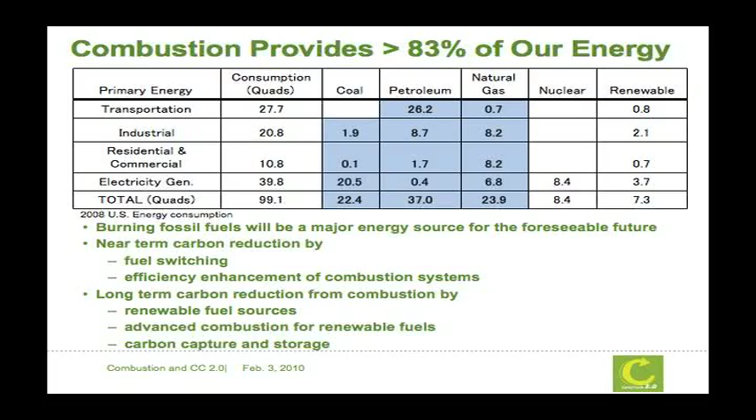You have seen this in various different versions. No matter how we look at it, burning fossil fuel will be a major source of our energy in the near future. I'm breaking this down into different energy and fuel sources, and the blue boxes are all relevant to combustion production. Even some renewables, for example in the transportation sector, actually involve combustion of biofuels. So 83% is what the US does, and other countries have different portions, but internationally combustion still plays a very major role in generating energy for us.

So if we want to look at near-term progress, what we can reduce carbon from is doing some fuel switching. I think we heard a little bit about fuel switching. For example, avoiding burning coal directly and switching to natural gas for power generation is a way of fuel switching.

Also, there's a lot of opportunity to increase the efficiency of the combustion system to reduce the overall carbon footprint, and we heard a little bit about how we can do that yesterday from my colleagues from Environmental Energy Technologies Division's presentations. In the long term, we can reduce carbon emissions from combustion by burning a lot more renewable fuels, and we also need to develop new combustion systems so they can be burned effectively. Of course, we have two talks previously on looking at how to capture and store the carbon.

To me, combustion is something the public is not very aware of in terms of its importance in their lives. Most of us know combustion from driving our cars, but if you look at this, there's a wide spectrum of technology involved in combustion in everyday life.

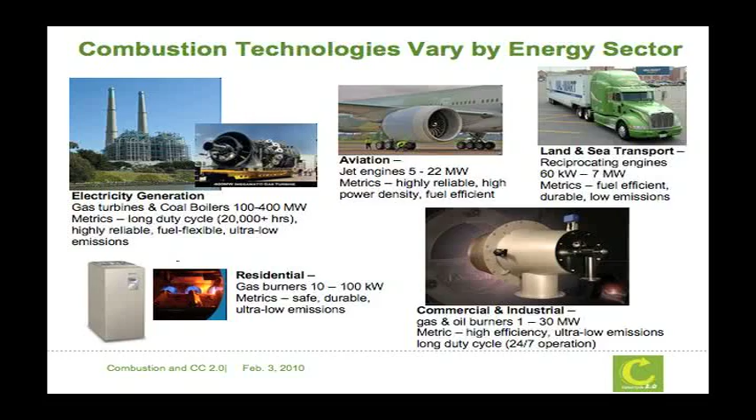For example, this is a power plant. This is a Moss Landing power plant down on the California coast. Most of the power generation is from coal, of course, and more is from gas turbines. Shown in this picture is one of the largest natural gas turbines being manufactured. It generates about 400 megawatts of electric energy. I don't know if you can see the people here, but this gives you the size of this engine.

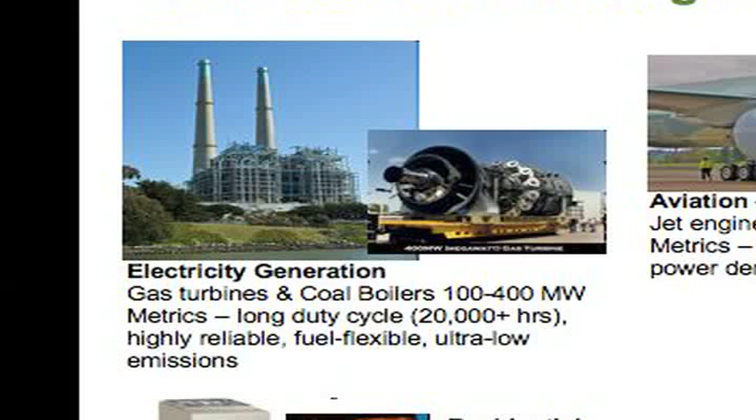The combustors are these cans here, which are the size of your typical garbage can. There's about 12 or 14 of them in these engines, depending on the size and needs. So basically, these are land jet engines, very connected with the jet engines we use for propulsion in civil aviation and also military aviation.

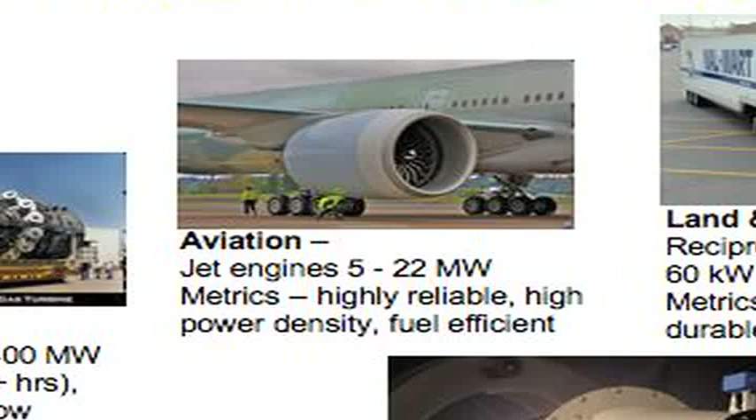Now look at the size difference. The largest jet engine we use to power a 777 extended range is only about 22 megawatts, so these are much larger systems for stationary power generation. Land transport trucks are actually quite small compared to stationary power generation systems, and they have very different performance requirements as well.

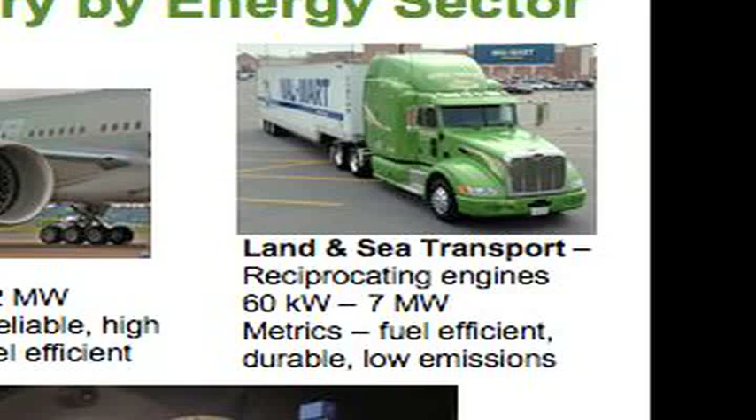For example, in power plants, they need to operate for close to 20,000 hours continuously before servicing, whereas in land vehicles, the lifetime is only about 10,000 hours, and we can stop and start them on and off again. So as you can see, the combustion technology for different sectors requires different kinds of approaches.

Now, turning to another major source, stationary systems are these commercial industrial burners. You may not know this, but they generate a lot of the products that we use. These systems typically run from 1 to 30 megawatts, and the burner itself, the combustor, is about 6 feet in diameter. They burn at atmospheric pressure, whereas these other systems burn at high pressure, so you can see the size and scaling of combustion systems are quite different.

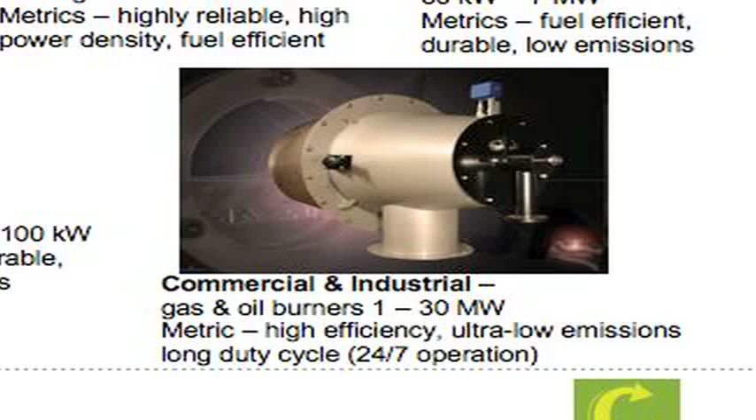And then there's a little residential burner that we're very familiar with in our home. So how do we deal with the combustion research problems? Actually, combustion is an integration of the multi-scale dynamics between chemistry, thermodynamics, and fluid mechanics.

On top of that is also the combustion mode. You may not be familiar with combustion mode. For example, a non-premixed flame is a Bunsen burner when you turn the air hole off. A partially premixed flame is when you turn the air hole on, and this is what you cook with, and this is what you heat your home with.

Premixed flame is when you have exactly the amount of air needed to oxidize all the fuel. That is basically an engineering development; it does not occur in nature. But that's what we are focusing on right now, to apply premixed combustion to all our power and heating systems.

On top of that is fluid mechanics. This is where I come in because I'm trained as a fluid mechanician in mechanical engineering, so I look at flame as a flow phenomena with reaction generating a lot of thermodynamics.

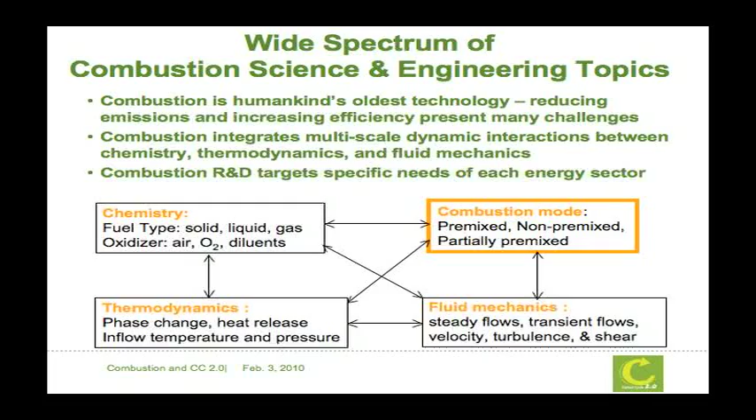In the near term, we can replace coal with natural gas. Another one we did not touch upon today is coal gasification. The technologies we've been hearing about in the last hour or so capture carbon from the exhaust of the combustion—those are called post-combustion capture. But there are technologies where you can capture the carbon in pre-combustion.

Vaporizing liquid fuels—we are doing it actually in our vehicles now, because even though we put liquid fuel in our car, when it burns, it's actually burning in gaseous form. Fueling land vehicles with gaseous fuel, natural gas fuel vehicles, or fuel cells, charging electric cars—those are very good options in the near term.

The challenge here is that we need to build fuel-flexible combustion systems. What I mean by fuel-flexible is that the furnace in your home is very well calibrated to natural gas of a certain range of heat values. So even if we're using liquefied natural gases, there is a concern that your home furnace may not work. This is a big challenge in the combustion community: to develop what we call a fuel-flexible combustion system, and also to meet very stringent emission standards.

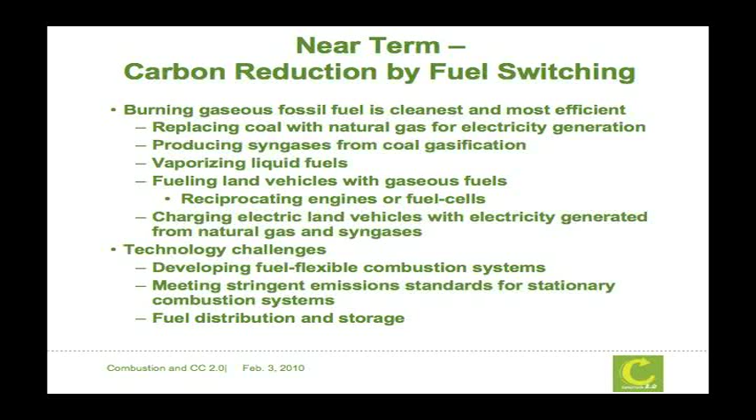The stationary systems are the most regulated system in the combustion arena. For example, many stationary systems are now required to emit less than 10 to 5 parts per million of oxides of nitrogen. So those are very challenging problems.

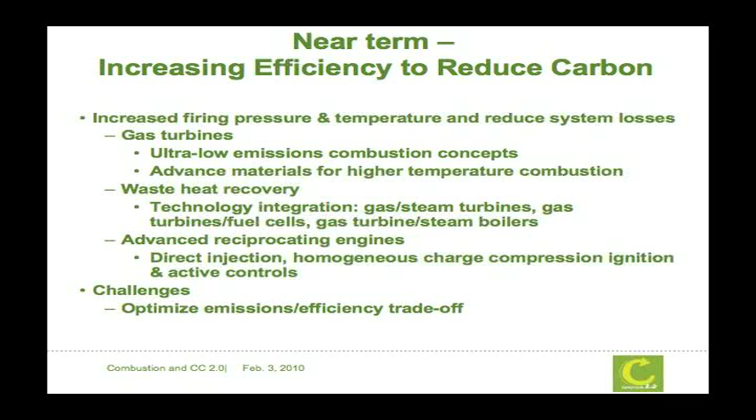We increase the firing temperature and decrease system losses—that's another way of reducing the carbon footprint. And again, the challenge here is to increase the efficiency without sacrificing emissions.

So let's turn to combustion research at LBNL. The majority of the efforts is actually conducted by the chemists. In the chemical science division, we have a large group looking at the chemistry at the molecular scale.

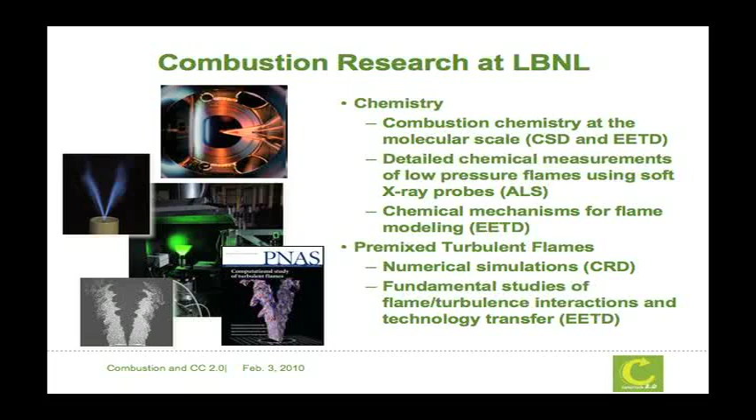At the ALS, they are using low-pressure flames and soft X-ray probes to look at detailed chemistry inside the flame, and then develop chemical mechanisms for flame models. Normally, in the combustion research community, there's an intermediate step to take the chemistry into a laminar flame model before going into the turbulent flame found in all combustion systems.

But because of the development of the supercomputer and high-power computing here, John Bell's group and I basically skipped that step by going directly from the numerical simulation, taking the chemistry, to simulating full-scale laboratory flames. This is one of our first collaborations, and you may see a version of that as a logo on the Carbon 2.0 poster.

Just want to make a point that this flame is stabilized by a 2-millimeter rod. The stabilizer for the flame is very important because somehow you need to hold it down. Okay, that was the old paradigm.

I'm going to switch to talk about the low swirl burner. The low swirl burner was discovered about 1991 when I was trying to find a robust burner to apply my laser studies. Because it's a very good laboratory burner and it stabilizes very lean flame, I thought that may be a good use of it in practice.

There are many, many different applications as well. More importantly, because we were able to deduce how the burner operates, we were able to scale this from the laboratory size of about 5 kilowatt all the way to the very large gas turbines I was talking about earlier, by getting some scientific underpinning of how the burner operates.

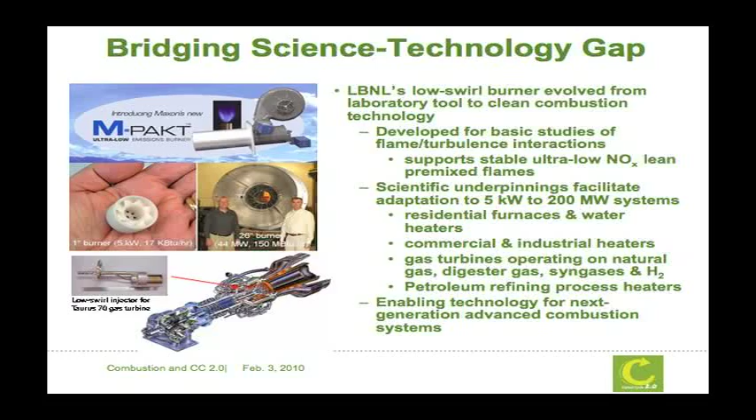Right now, we have projects to put it in your home furnaces and water heater. It's already commercialized for industrial heaters. We have projects looking at burning digester gas, one of which I hope will be in the East Bay MUD water treatment plant right off the Bay Bridge. We're also developing it for the clean coal power plant, and working with some companies to look at how we can combine the burner with other technologies for the next generation systems.

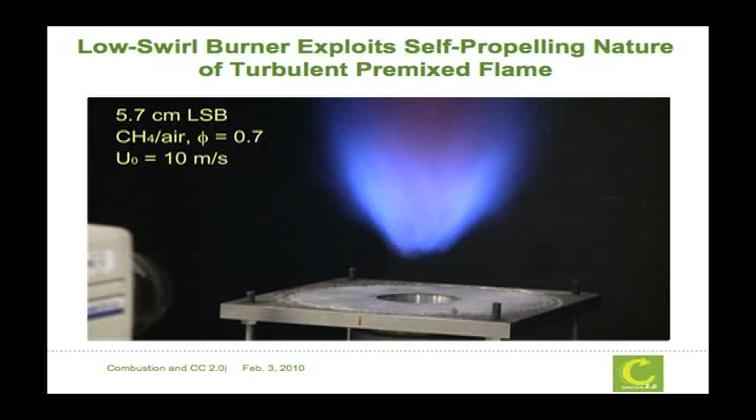Right now we're running at about 10 meters, but there are experiments to show that it can run all the way up to 130 meters.

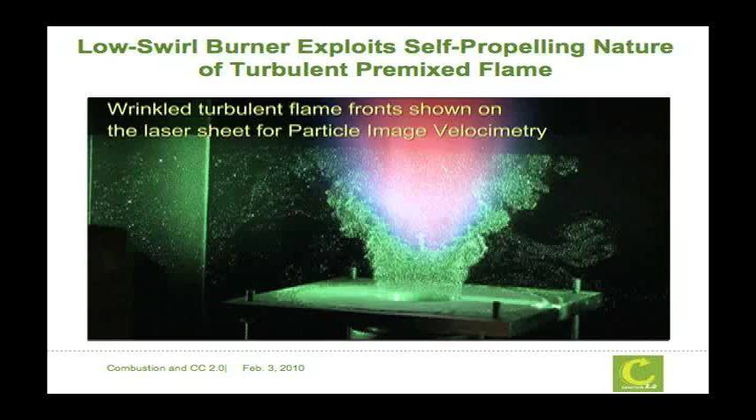All the chemistry actually takes place in the boundary between the bright and the not-so-bright area. This is where all the chemical heat release occurs. But for the pollution formation, actually the place is here—heat release here, and the pollution formation is a little bit further downstream.

The important thing about our collaboration with the simulation group is that it helps us identify what are the important basic subjects that we need to study. Here we have a national lab, university, and industrial collaboration to look at how we take the burner for what we call high hydrogen fuel gas turbine and clean coal power plants.

Most importantly, we need to look at these flames at high pressure. At LBNL, we can only look at it at atmospheric pressure. But taking these flames to high temperature, high pressure is non-trivial.

Chemical kinetics of hydrogen and syngases maps to the effort here in the laboratory in the chemistry area. The heat release model, which we're working with John Bell's group on—as I said, this is all we can get, some sort of planar velocity at different heights of the flame. But they can give us a wealth of information if we're able to analyze the computational result the way that we analyze the experimental results.

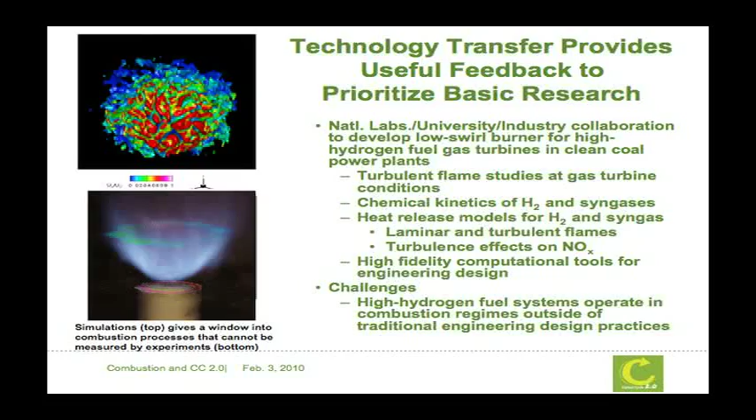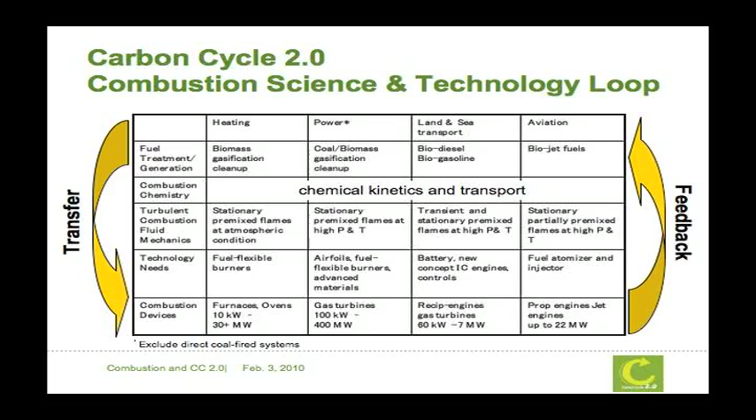Now, of course, the whole picture doesn't really rely on combustion alone. In one sector we need fuel flexible burners. But the other thing is that when we look at gas turbines, we need to look also at the airfoils that we need for the compressor and also the turbines. And also advanced material—if we were to take the firing temperature up, then the materials have to be able to withstand 1,000+ hours of operation without degrading.

In the land and sea sector, for land, of course, battery is very important because we can switch from a petroleum fuel car to an electric fuel car. So we need to have all of this as the whole part of the equation.

So in the long term, what can we do? We need to look at reciprocating engine and jet engine for biofuels. Our sister laboratory over in Sandia, in Livermore, has a very large group looking at reciprocating engine research, and we can certainly work with them on this.

Near zero emissions coal power plant is what we're working on right now. Of course, we're looking at only the combustion part, and also, as the two previous talks showed, we have capabilities here to do the capture and storage. Fuel cells and gas turbine hybrid systems, and on and on.

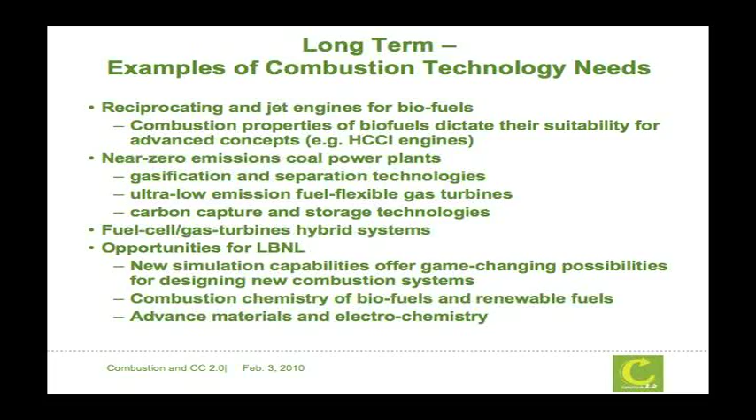What I'll leave you with is that, in my own experience, the new simulation capability here in the laboratory can be a game-changing possibility for us to look at new combustion systems. And with that, I close, and thank you very much for your attention.

So I'm going to start off as our point of reference, the Carbon Cycle 2.0 initiative, and this picture that outlines some of the various areas we are interested in for this new lab initiative. What I'd like to do is weave a story about the mathematics and computer science that goes into, if not all, at least most of what's going on in this initiative.

So I'll start off by talking a little bit about the computing science facility, because every time I talk to people at the lab, they always say, oh yeah, computing, that's about the big supercomputing center you have. And in fact, that is a large part of what we do, but I'm going to tell a slightly different story. To start off, I'll tell you a little bit about the computing facilities we have.

Currently we have a computer depicted here, which has about 38,000 processors, or cores as we like to call them now, with a peak speed of about 356 teraflops per second. In the very near future, within a year or so, we're going to have a machine with 5,000 more cores in phase 1. In phase 2, we'll have on the order of a petaflop of computing power per second.

Now, what does that mean to the average user? Well, in 2011, we'll have on the order of about 1 billion CPU hours for people to use for their simulations, modeling, and so forth. In addition, we have some new money that came in this past year to hire postdocs to work on a new initiative called the Computational Science and Engineering Petascale Initiative, aimed at getting people hired to work directly with people in domain sciences to take their codes so they will be able to run on such a machine. So that's the computing facility.

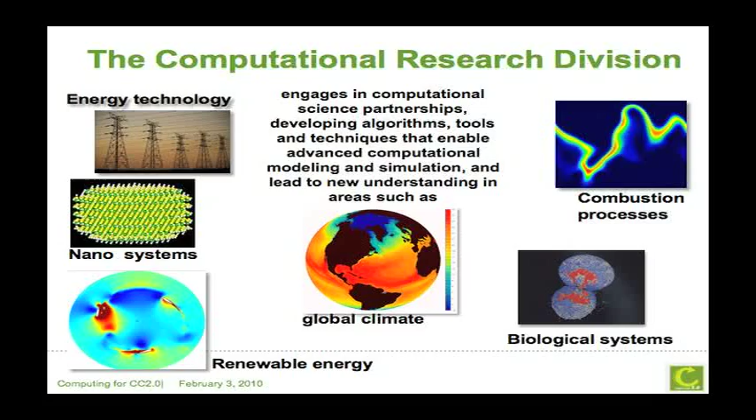I've outlined here some projects that are already ongoing, and you'll see some that have already been alluded to by my colleagues: combustion processes, some global climate calculations going on, some renewable energy projects, some simulations in nanosystems, and even power grid simulations. What is common to all of these is that we're using the mathematics and computer science to address very large-scale problems through collaborations with other domain scientists.

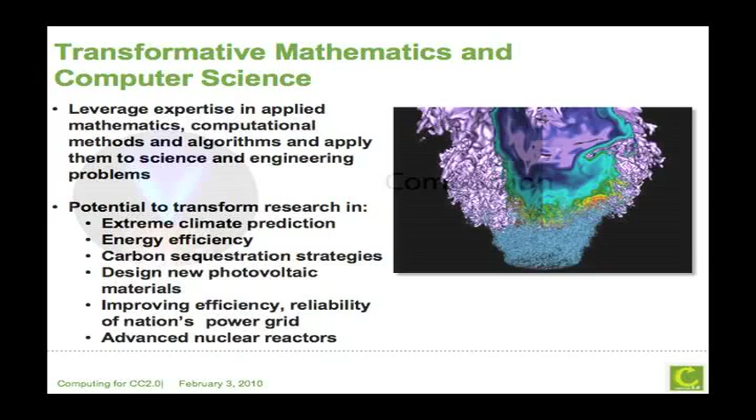So what I'd like to do now is jump into a couple of stories to highlight some of the activities and give you a sense of what kinds of things are possible when you put these folks together. All right, so let me start off with combustion. That was the one that's freshest in your mind.

I want to talk a little bit about the mathematics now that Robert was alluding to. So what's going on here? When John Bell started working with Robert, I believe it was 1996 or 97, roughly about 10 years ago, a little over 10 years ago, they started looking at these problems, and they saw a problem that looked very interesting, but by no means did they have the formulations or the codes to do something that would be even remotely of interest to Robert, I'll have to say. I mean, they were very, very large scale. Now, this is not to say anything about the codes themselves. Rather, that was the state of the art as it was at that point. The reason I like to tell this story is because it has all the components that I think are necessary for a successful collaboration.

So let me tell you what the components are.

First off, what John and his group did is they looked at the mathematical formulation that was being used at that time and realized that it was highly restrictive and was really cramping the computational speed that could be attained, because the formulation had everything in it.

What they did was realize that parts of the math in the original equations really were not necessary, they were unwanted. They got in the way and restricted the time step needed to solve this problem accurately. So they did what most good mathematicians do: if they don't like something and can't solve it very well, they got rid of it.

So why not just grid up around the area where you believe the most interesting phenomena are and concentrate your computational work just on those areas. That involves a lot of software, trying to understand how you might adapt that mesh so it goes where it should be. For us it's easy, we just look and say it should follow the flame there. But on a computer it's a little more complicated.

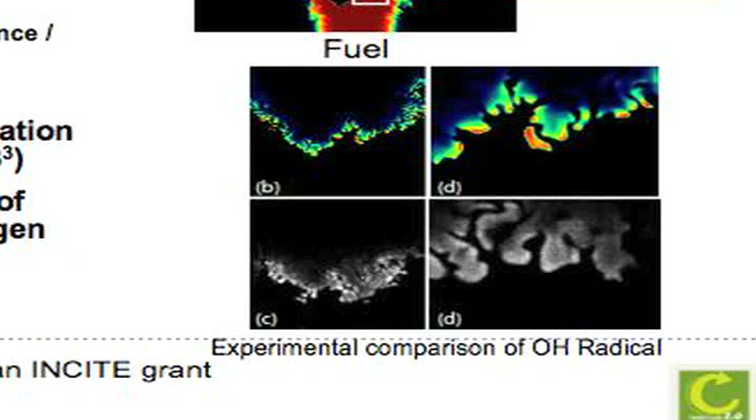So that's the second component. They use adaptive mesh refinement to highlight and focus the computational work just on the areas where it's needed.

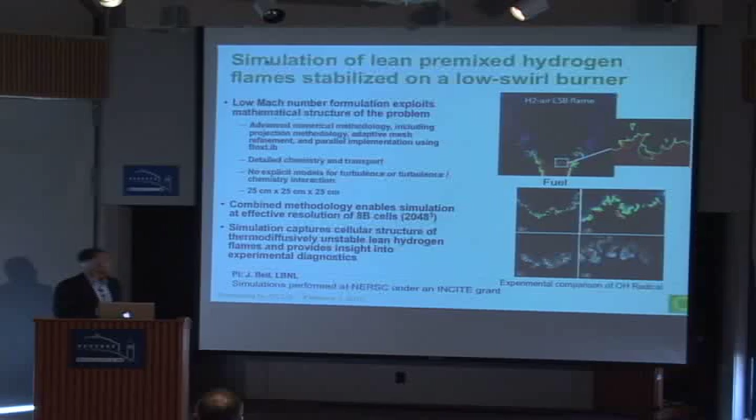The third thing is that because of the advance of computers, in particular massively parallel computers, we're able to take advantage of the parallel processing power to get an extra speed up factor of about 4,000. When you put all of these things together, you now have a code running about 800,000 times faster than it was in 1996.

All right, that's an important enough number, I'll repeat it again: it's 800,000 times faster than it was in 1996.

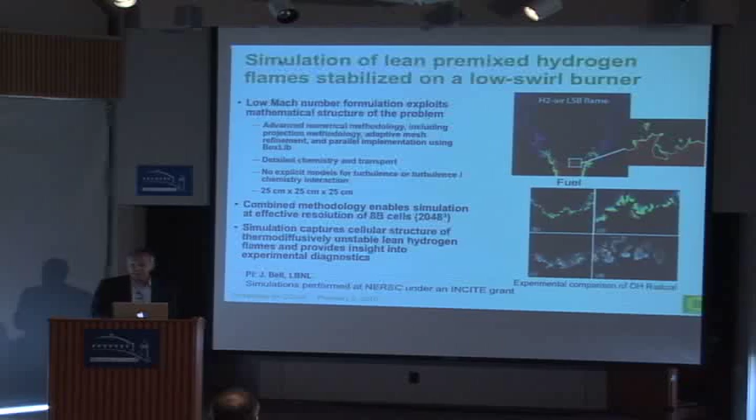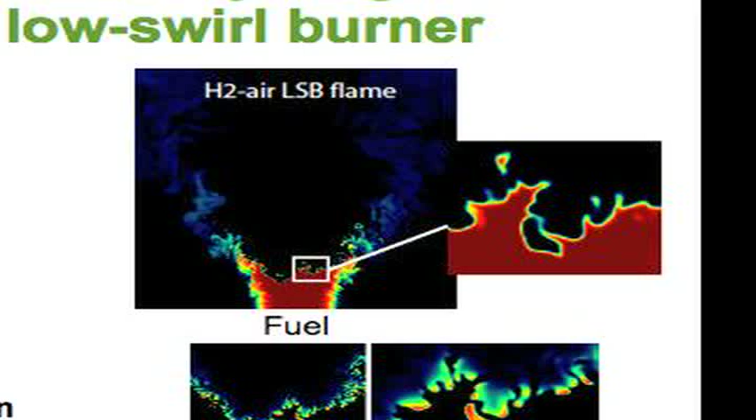What that does is it allows you to actually start thinking about looking at laboratory scale simulations. This little picture depicts what was available back in those days. Now you can take a look at a whole flame, like a low swirl burner, and look at the entire flame in the laboratory and compare that against experiments. So the combination of the math, the software, and the computers gave you that kind of capability.

So now you are able to simulate something that would be the equivalent of 8 billion cells if you were to do something naive like a uniform mesh.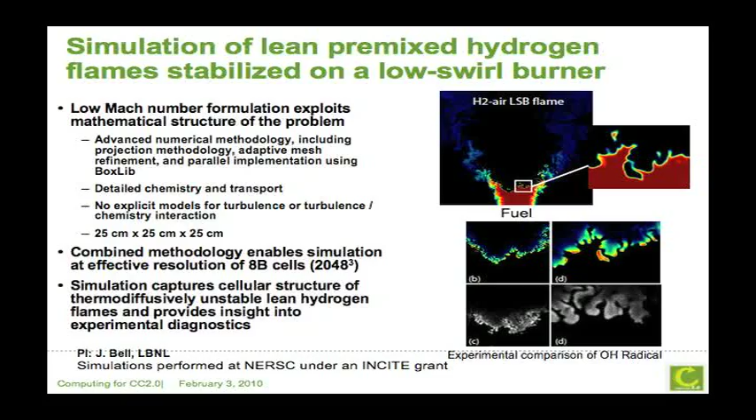Now, what that simulation allows you to do, and this is where I think the really exciting science starts to come into play, is that you can now capture the cellular structure of these turbulent lean hydrogen flames, premixed lean hydrogen flames. So you can actually start to analyze what's going on in the simulation to then feed back information to the experimentalists, who can come back and ask more pertinent questions.

A picture's worth 1,000 words, a movie's probably even more. So here's a simulation that John Bell and his group came up with.

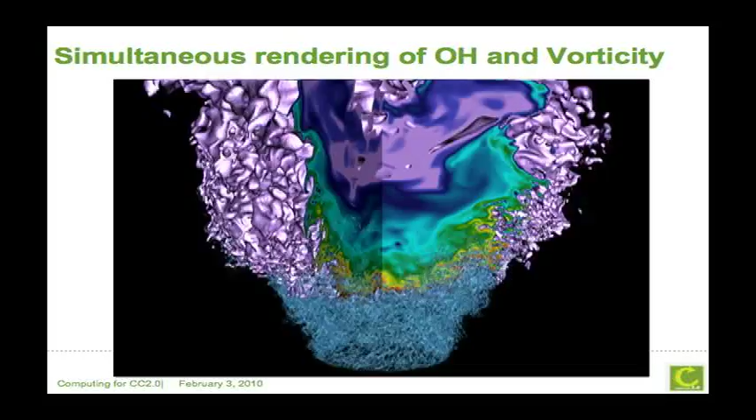What I'd like to point out is not so much the details here, but look at the swirl coming in, the flame in here, and the detail and wrinkling of the flame itself from the simulations. You can see out here where there's not a lot of action, there's not a lot of meshing going on, so you're not doing a lot of computational work there. You can start to quantify what's going on and ask questions about how a different design might affect the flame, or why a particular flame is burning with a particular intensity. All right, so that's one success story.

Let me switch gears now to carbon capture and sequestration, because I want to tell you a short story on each one of the areas. We've heard a lot about carbon capture and sequestration both from Bernd and Don. Let me tell you a little bit about what's going on here in terms of the computational aspects. Bernd mentioned that one of the things that is very exciting is to try to develop new, novel materials to do carbon capture. Carbon capture is very expensive. If you can come up with new materials that would allow you to cheaply capture the CO2, it would be much more effective, and coal plants would be able to do it more effectively.

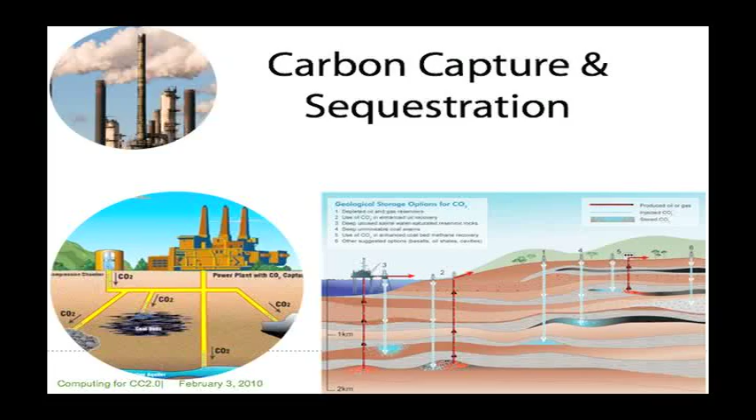The question, though, is that there are a lot of different proposed materials. Zeolites, for example, are one. I think Bernd also mentioned the metal organic frameworks. And the problem is that there are literally millions of these types of proposed materials, or hypothetical materials. The question is, which one should we really study?

Now, if you remember, Bernd put up a slide with a graph that showed the computation of the selectivity for CO2, and each point required, if I remember correctly, two weeks of simulation time. So let's do a quick calculation. If there's 5 million molecules or structures in a particular database, and it takes two weeks per calculation, that's on the order of 10 million weeks, or roughly, at 168 hours in a week, roughly 1 to 2 billion hours of CPU time to do the entire database for one particular set, say metal organic frameworks or zeolites or whatever.

I mentioned earlier that we're about to get a machine that's going to give me 1 billion hours per year. So if they would allow me to use that entire machine for two years, I'd be able to solve this problem. Chances are I'm not going to get that, as much as Bernd wants that, or any other calculation like that.

So the idea here is, can we more intelligently screen those structures to find the ones that might have the best selectivity? How do we do that? The idea is to take the molecules that you already know have been synthesized and characterize them in some way.

Here's one characterization. I'm not going to tell you just yet how we did that. But you basically just follow the principle that form should follow function. So if you can find other structures in your database which you can cluster around this particular one, you might say, okay, let's go analyze those. And that might only be 100 out of those 5 million or so. Okay, 100 I can start to think about doing analysis on.

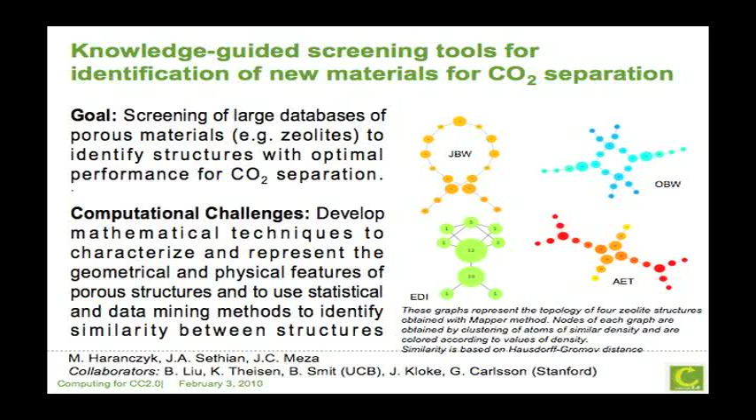And that's exactly what we've been doing in collaboration with Gunnar Carlsson at Stanford, who's developed a program called MAPPER, which will take a set of structures and come back with structures that have essentially categorized or clustered these in a way that says all structures that look like that will be similar in some sense. Now, the tricky part is you have to tell it what that similarity measure is, and that's where the domain scientist comes in and says, here are the kinds of things I'm looking for.

Now, I'm not ready to report final results on this, although they're tantalizingly close. I wish I could show you this. We've actually come up with about 20 compounds that we think have very high selectivity, at least according to this MAPPER program. The question then is, we're in the process of running them through a simulation to see exactly what that simulation will predict in terms of selectivity. So hopefully in about 6 months, we should be able to actually show you those. Of course, the real test will be when they start synthesizing those and see if they actually agree with the predictions we had.

Okay, the second part of this project, again with Bernd, is that he mentioned these metal organic frameworks, and they're very porous, have a lot of structure inside. Then the question is, when these molecules go into these things, do they go in and can they come out? So there might be space in there for them, but if they can't turn the corner, so to speak, one way or the other, one particular molecule might be able to go through, whereas another one can't because it doesn't bend and can't get through this little bend over here.

So here we're using some methods from the fast marching method community, developed by Jamie Sethian, a professor in the math department down on campus. He developed these a good 15 or 20 years ago, but we've been using them to good effect here. In essence, they came out of a problem in robotic navigation where he was trying to develop a technique that would allow a robot to walk around a particular building and get around corners. So it's the same kind of analogy here.

This molecule here wants to go in here, and we know that it can go around here, but you have to follow it through a particular path. This one can't because it won't bend. So you can do this automatically now with these new mathematical techniques.

All right, very quickly on the geologic carbon sequestration part of it. Here, Don already mentioned the fact that there are a lot of issues having to do with trying to understand subsurface flow, characterization, trying to understand what happens when you pump the CO2 into the saline formations and you get these fingers and other types of bad things. And so what you're trying to do here is understand what the flow of the materials are through the porous media. And here, the problem is that you have very complex geometries in the subsurface.

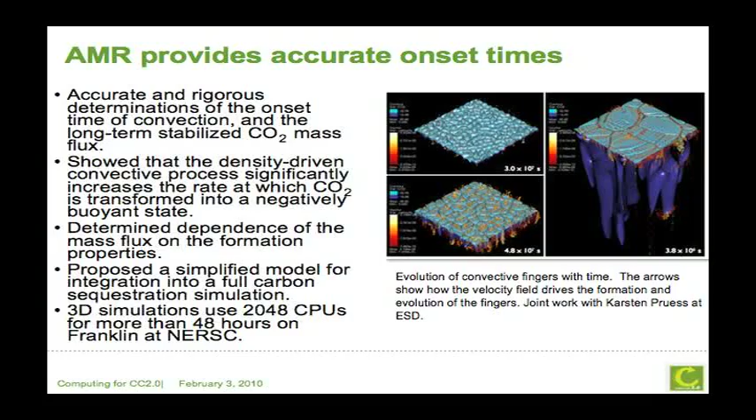You've got lots of different materials, fractal in some cases. And what you want to try to do is essentially follow that CO2 through there through some sort of solution of a partial differential equation. So what we're doing here is, again, using adaptive mesh refinements to try to understand how these different flows will go through these different reservoir structures. And what you can start to see here is that you can follow these fingers with time by using an adaptive mesh refinement that essentially just follows the flow of the fluid through here.

Again, why are we doing this? Because if you were to try to do this with a standard uniform mesh or even a block-structured mesh, it would be very difficult because of the large size and the multi-scale nature of these types of problems.

All right, here I wanted to put a short plug-in for how some of the computation is also tied into the experimental facilities here. One of the reasons we're interested in looking at these types of methods from the previous slide is we can use another technique called embedded boundary methods, in which you can take these methods, and you then take pictures or images from, say, a place like the ALS, and you can automatically generate from that image a grid that you can then use in a computational simulation.

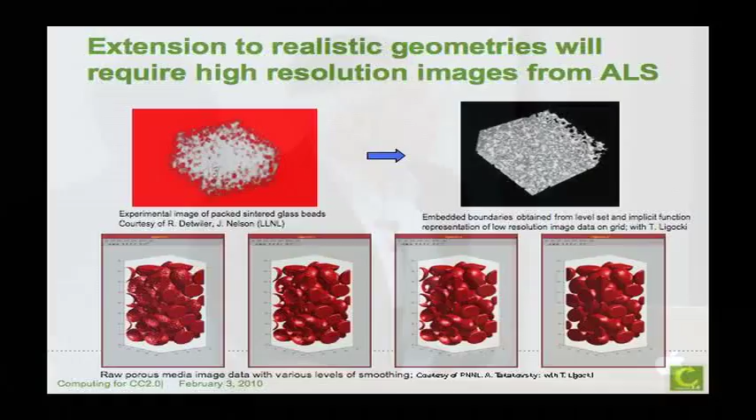What's interesting about this is that if you do this, then you can start to understand some of the porous media. And I don't know if those things are still going around that Don had, but you want to try to understand how the pore structure here will affect the flow through the fluid, through the material.

Another aspect of Carbon Cycle 2.0 is solar photovoltaics. Here is a project I worked on a couple of years ago. The idea is to try to predict the electronic structure properties of a particular material for the purpose of developing more efficient solar cell materials.

One of the things we looked at is calculating the electronic states for a particular material, in this case zinc telluride, doped with a certain amount of oxygen. It turns out some people had proposed that if you dope it at particular percentages, it would create an extra state, which you can barely see here, allowing electrons to jump from here to a middle state and back up, increasing the efficiency of the solar cells.

The question was, if you try to do this with these low percentages of oxygen, you need a very large supercell to do the kinds of electronic structure calculations required. In this particular case, on the order of about 3,500 atoms.

The standard techniques for electronic structure calculations in these types of problems require methods that are order n cubed, meaning computational requirements grow as the cube of the problem size. So 400 to 500 atoms is not unthinkable, but 3,500 atoms would take a large amount of time to solve.

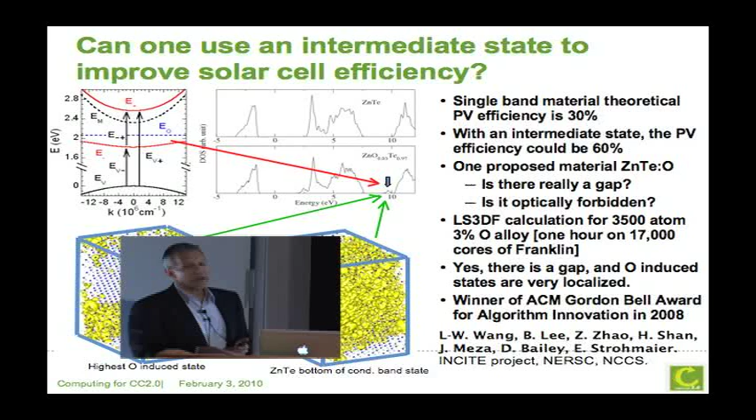So we developed a new algorithm using a divide and conquer approach to split this domain into many smaller domains, which we then solve using a DFT calculation, density functional theory. By doing that in a divide and conquer approach, it gives you a linearly scaling algorithm, allowing you to solve problems with 3,500 atoms in about 1 hour using 17,000 cores, which is doable.

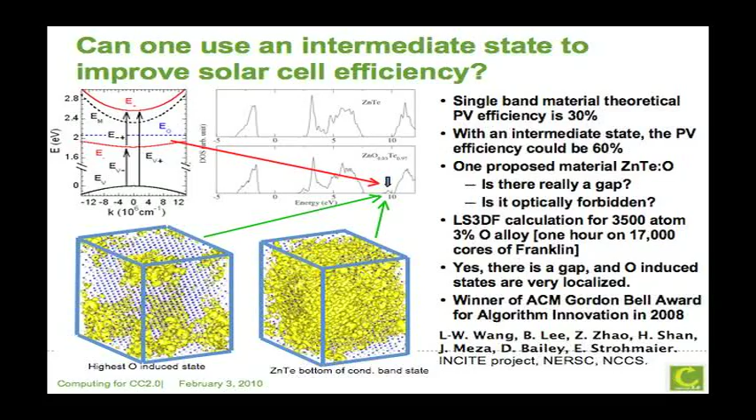Whereas if you tried to do this on a standard DFT calculation, it would have taken closer to about 6 months. This was a winner of the ACM Gordon Bell Award for Algorithm Innovation in 2008.

Here's a summary of that particular algorithm. We were able to get 135 teraflops on the Franklin machine I mentioned earlier, using close to the full machine, 37,000 processors.

The good thing about this algorithm is that not only does it scale linearly, but it also has very high parallel efficiencies. We were able to run it on up to 163,000 cores at the Argonne machine and close to 150,000 processors at the Cray machine at Oak Ridge, achieving a peak speed of 442 teraflops, which was the second highest rating that particular year.

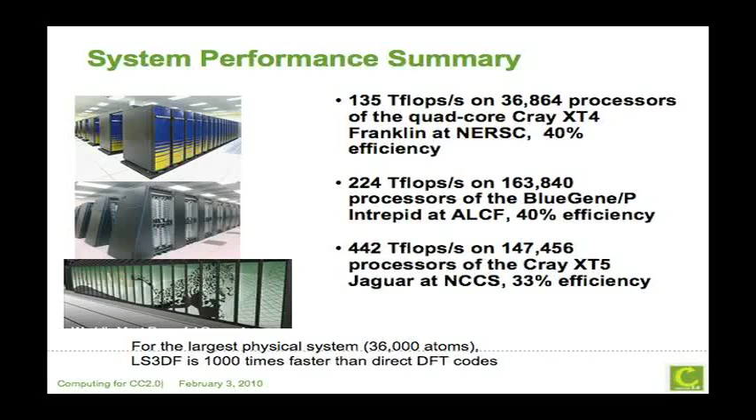I've concentrated my activities here on carbon capture, carbon sequestration, and some combustion activities, because that's what today's activities were like. But I would be remiss if I didn't at least mention some of the other activities going on in the Computational Research Division, which I think are intimately linked to the Carbon Cycle 2.0 initiative.

There's work ongoing to understand extreme events. One of our staff, Michael Wehner, is looking at what would happen if the climate keeps going in the direction it's going—what that would mean for extreme events like droughts, hurricanes, heat waves, and things like that. He's come up with some interesting predictions showing there's going to be a lot more heat waves and less precipitation across most of the North American continent.

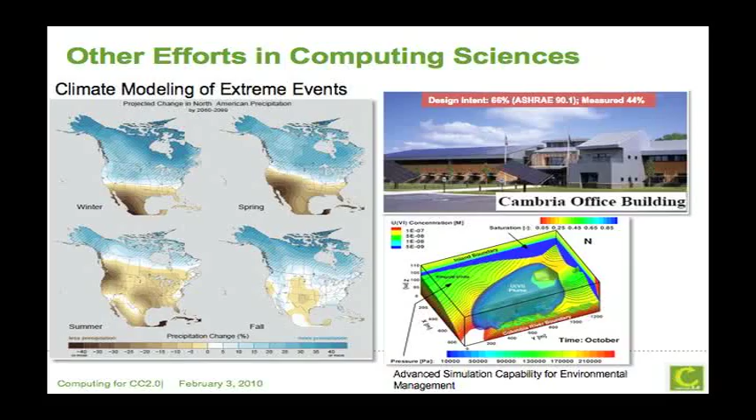There are also activities just starting to develop better tools for modeling building energy efficiency, which Marianne talked about yesterday. And there's a very new effort to understand subsurface flow for environmental management and waste processing problems, but a lot of the same techniques being developed there would also be useful for carbon sequestration.

Now, this one's kind of a cool one—it's an ongoing effort. Renewable energy, something we don't talk about much.

This is a problem that a professor here, Per-Olof Persson on campus, is working with us here at LBL to try to understand how to develop better wind turbines. The problem is that very large wind turbines are very efficient, but they're also very hard to transport from place to place. So they're looking at developing smaller turbines which allow you to move them from one place to the next.

But when you do that, they're not as efficient as the larger turbines. So the question is, can you predict the performance of a particular design and then compare them against other designs to see which one is optimal?

What makes this problem so difficult is that you have very complex geometries, as you can see in the picture up there. And they're deformable domains, because as the blades go around, they change. Then, of course, you've got to follow all of the fluid flow and stuff like that. So it's a very challenging problem, and he's been developing some new mathematical methods for trying to figure out how to solve those accurately.

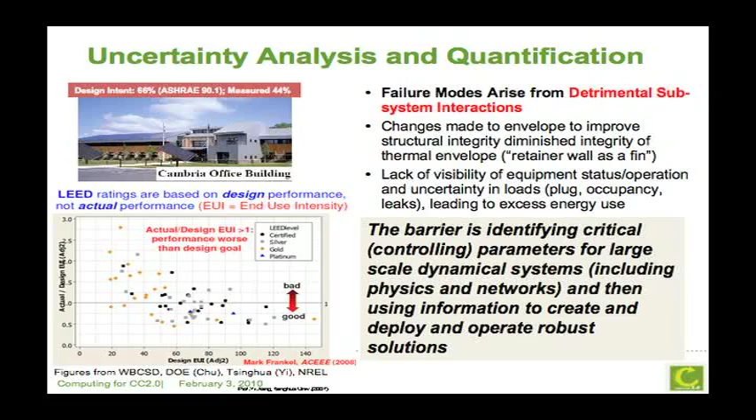Here's one particular building where the design intent was to have 66%, and the actual measurement was around 44% of what they should have been. This graph shows that the design intent is to have this kind of energy efficiency, but then what happens is you can be off by as much as close to a factor of 3.

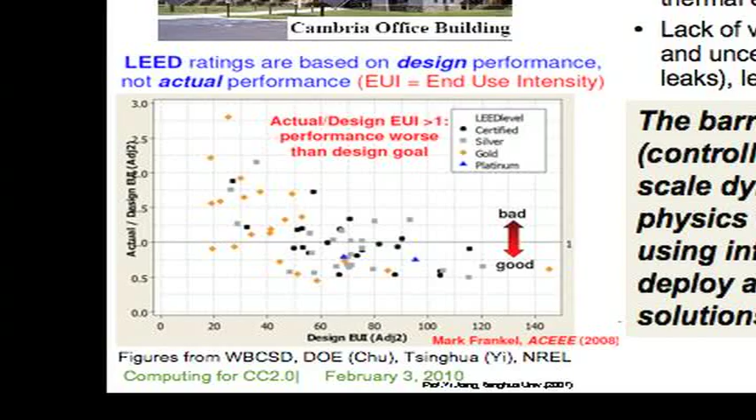So in this case, anything above here means the energy efficiency of the building is worse than it was designed for. The problem is, one, you don't have the computational tools for predicting from first principles what the energy use of a building is. And it's very difficult to quantify the uncertainty, because there's so many different things going on between the time the building is designed and operated. In particular, I think Marianne alluded to the fact that just having different occupancy behavior will have a large effect on the efficiency and energy use.

One of the things that is very important is that as we become more dependent on models and simulations, we're generating a lot more data. The one movie I showed you—I don't even want to say how much time it took to produce—but there's a lot more data that's already been generated through those simulations, and we're trying to understand exactly how to analyze that in a very effective way. So one of the things we're looking at carefully is trying to understand how we can analyze that data in a meaningful way to try to get the science out of it.

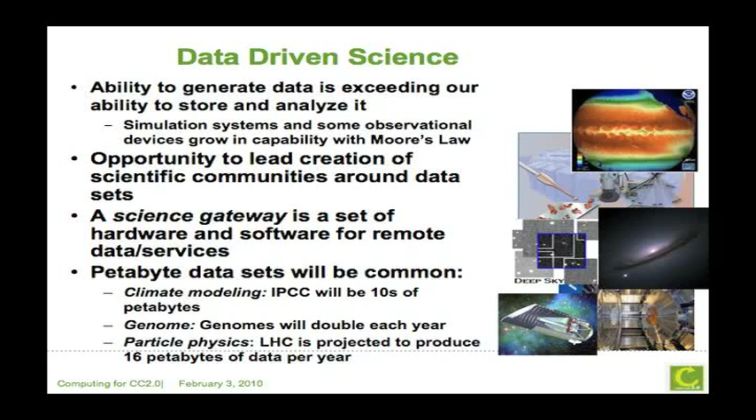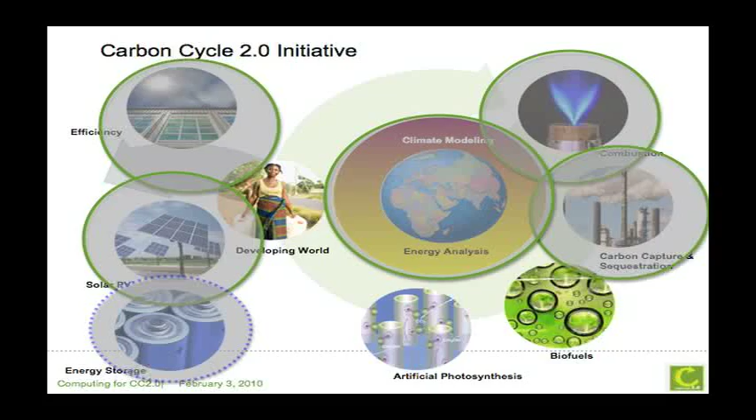To wrap things up, if this is a Carbon Cycle 2.0 initiative, one thing I think of is computation covering that space. I've talked about ongoing efforts in combustion, carbon capture sequestration, climate modeling, building efficiency, solar PV, and a nascent effort in energy storage that's still ongoing. So in terms of the kinds of activities within the initiative, computation plays a large role. The only ones I don't see a very large role in right now are biofuels and artificial photosynthesis, but I think that's just a matter of time. Hopefully we can convince those folks to start using more modeling and simulation.

I'll end with a quote from somebody you probably recognize, on the role of modeling and simulation: supercomputer modeling and simulation are changing the face of science and engineering and sharpening America's competitive edge.

I think, as I look around, there's a lot of opportunity for the computational research division to work outside and with other divisions. So I'm also using this talk as a way of encouraging anybody who might have some interesting problems to come to us—be glad to work with anybody. Thank you very much.